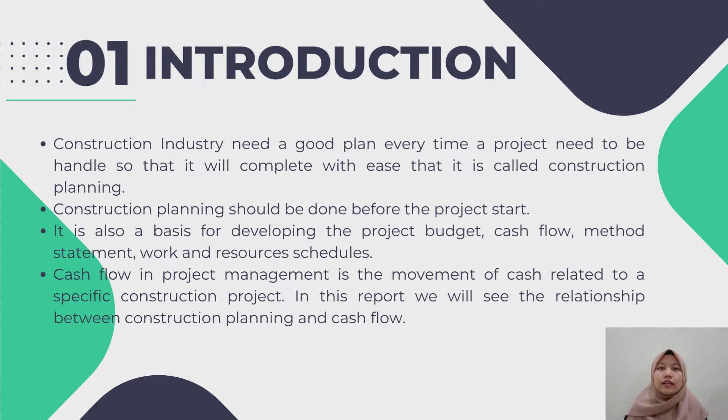Cash flow in project management is the movement of cash related to a specific construction project. In this presentation, we will see the relationship between the construction planning and cash flow.

Now, for the project background, the project title for this case study is Pembinaan Semula dan Menaik Taraf Sekolah Daif tahun 2019 di Sekolah Kebangsaan Seri Paya, Batu Pahat, Johor. The building is located at Parit Raja, Batu Pahat, Johor. This project is a new construction of a one-story school.

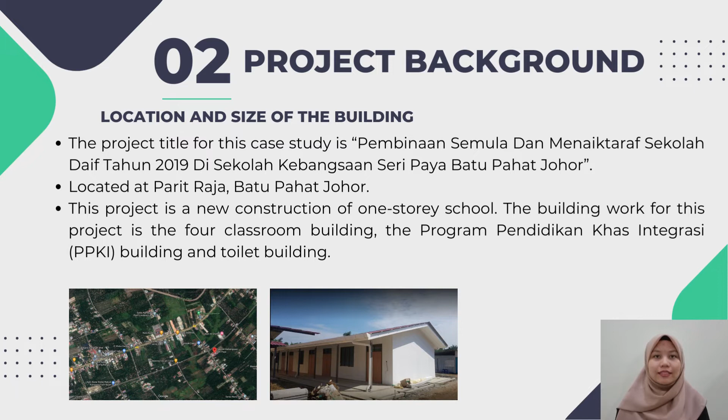The building work for this project is the 4-classroom building, the Program Pendidikan Khas Integrasi (PPKI) building, and the toilet building. The client of the project is Kementerian Pendidikan Malaysia (KPM), known as the Ministry of Education (MOE). It is a ministry of the government of Malaysia that is in charge of the education system.

The users of the building are people who go to work and study at Sekolah Kebangsaan Seri Paya, known as SK Seri Paya, which is a primary school.

The purpose of making this building is to achieve Malaysia's mission of making schools in rural areas so that every child can still go to school. This mission is called Construction of Sekolah Daif. That's all for the project background.

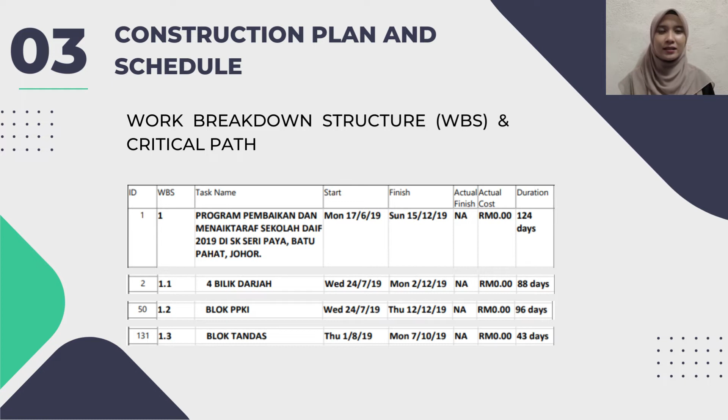The tool used for this critical path method is Microsoft Project. During the process of filling in all the work for the project, there were no errors detected. All specified job sequences and the given durations are not stacked. This may be because the project is not so big.

The element frame for the PPKI block is the longest, which is 25 days. This is because the PPKI block uses the method of in situ concrete, which takes longer than the frame for the toilet block, which takes only 6 days due to its smaller area compared to the other blocks.

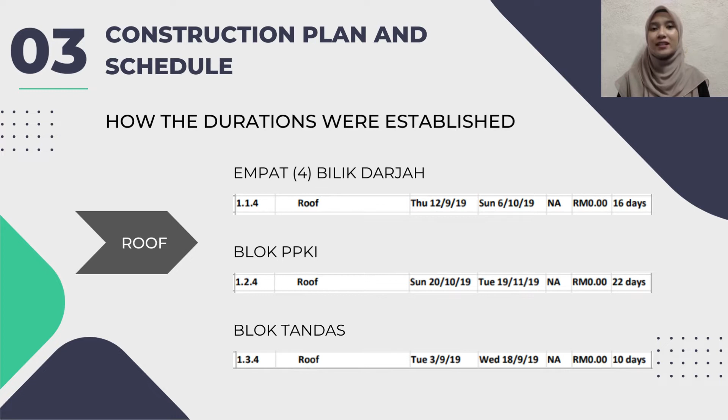The frame construction process is also complex as it is necessary to follow the desired sequence and indeed takes time to complete. Next, for the element roof, the duration was established accordingly. The roof installation work is carried out after the preparation of frame construction. Block PPKI takes 22 days for roof installation, which is longer than the other two blocks. This is because the design of the roof is slightly complex.

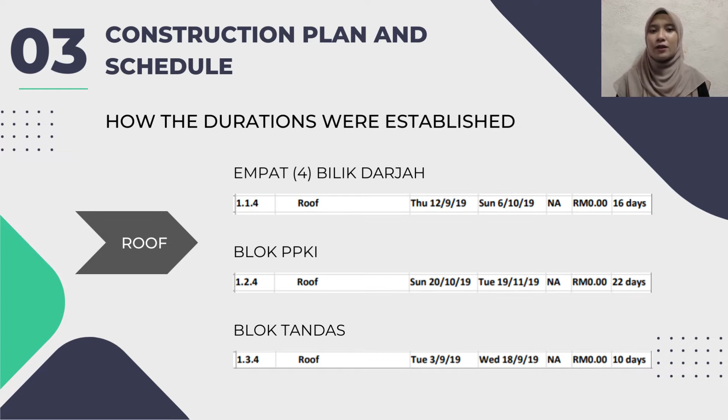The specified period is the amount of time that is acceptable. This is because the type of roof used for this school building is a kind of clapboard roof, and roofing materials are also easily available.

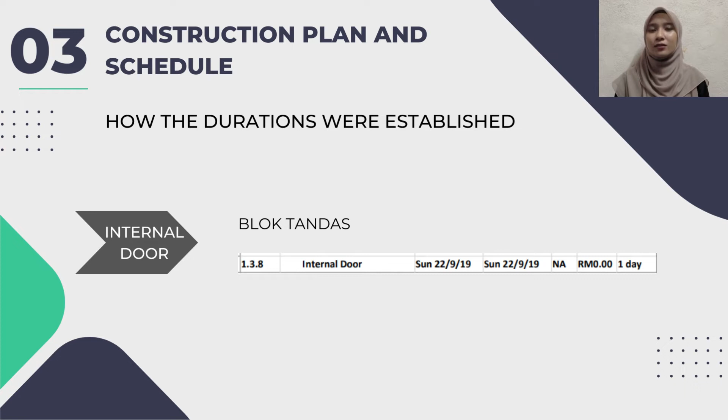Furthermore, for the internal door element, the internal door is installed after the preparation of the external door. This is because the workers who install the door are the same for all external door installation work. The duration of the installation of the internal door takes 1 day only. This is because the internal door to be installed is in the toilet area only. The type of internal door installed is PVC material, which is usually used for toilets.

In this project, critical tasks are work below lowest floor finishes and frame construction. Other construction work needs to wait for the preparation of the work below first. After completion, it can be continued with frame construction.

The frame is the second most important phase in this project. Other elements should not be installed if the frame is still not formed, while non-critical tasks are tasks that do not depend on the completion of any other task. As an example, plumbing work can be done before or after the particular stage is completed.

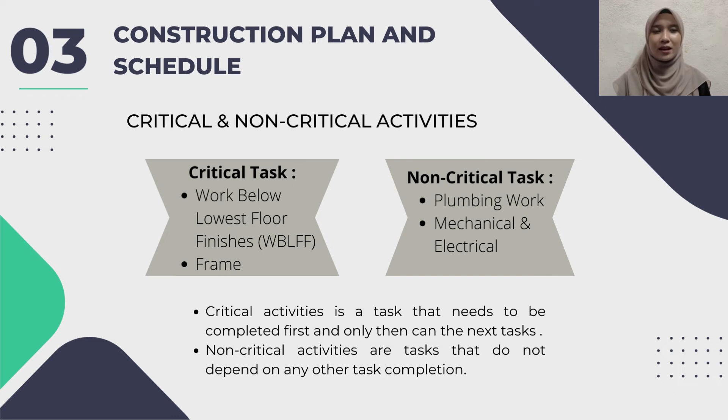For the planning tools, we chose Microsoft Project. It provides integrated Gantt chart scheduling, cost tracking, and resource management. Project is the go-to solution for most construction companies and has become tightly integrated with SharePoint over the years. Gantt chart scheduling in Project employs critical path analysis that can be manually or auto-updated depending on your need to analyze network logic.

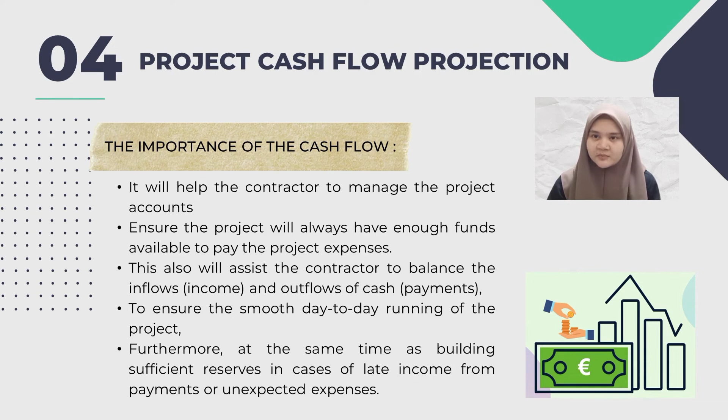Next, we will look at the importance of cash flow. Firstly, it helps the contractor manage the project accounts. Second, it ensures the project will always have enough funds available to pay project expenses. This also assists the contractor to balance the inflow and outflow of cash. Next, it ensures the smooth day-to-day running of the project. Furthermore, sufficiencies are built in case of late income from payment or unexpected expenses.

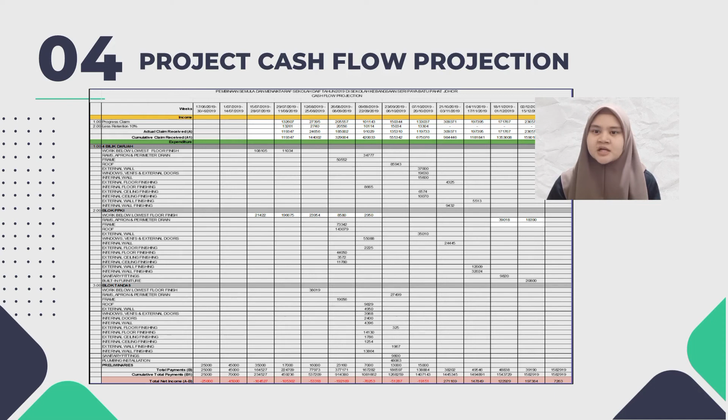In addition, here's our table for the cash flow projection that we use to create our S-curve and sawtooth diagram. That's all from me. Alif will continue with the explanation of S-curve. Thank you, Shafika. Hi, Assalamualaikum.

We're back again with me, Alif, on another part, the S-curve explanation. The display of anticipated financial flows on the timeline using a cumulative cost chart, whose representation is the S-curve, is a useful method for assessing how well a building project's financial investments were used. From the start of building until finish, the S-curve depicts the cost of the investment project.

The cumulative cost chart for building projects has an S shape, therefore the curve's name. The cost curve's fluctuating slope reflects how quickly work is progressing overall. In projects, it is presumable that the profile of total cost versus time elapsed will resemble an S-curve. The Guide to Project Management Body of Knowledge, the PMBOK, describes the S-curve as a visual representation of cumulative cost, labor hours, percentage of work, or other factors plotted against time.

Moving on to the construction of the S-curve: S-curve analysis in construction is interpreted as managing a project with knowledge and traceability in the context of sustainable construction, while displaying the cumulative cost, labor hours, or other quantities plotted against time. To construct them, we must have a progress claim for work done, project cash flow schedule, the claim which includes prelims, work done, or materials, and allows a 5 to 10% retention sum.

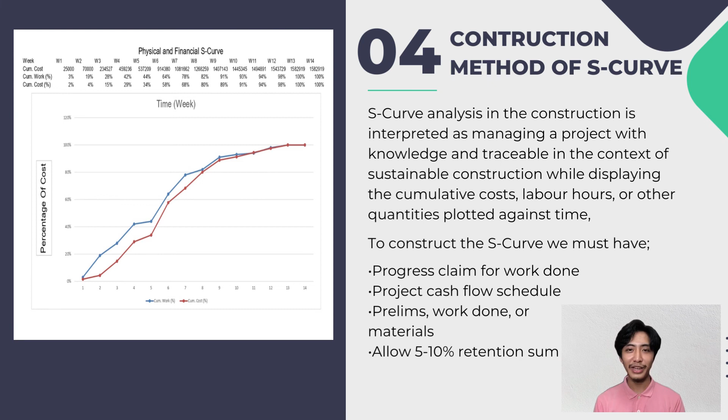And then the highest capital for the contractor, last but not least, is the profit in week 14. As we can see in the table, it is 7,263 ringgit. That's all from me. Now I will invite Nora Amir Afika to continue our presentation.

In conclusion, construction planning plays a big part in starting a construction project. For the project of reconstruction and upgrading of Sekolah Daif 2019 at Sekolah Kebangsaan Seri Paya, Batu Pahat, Johor, it took about 6 months for all the building to be completed. The project's S-curve and sawtooth diagram, along with the project work breakdown structure, show a better understanding of the movement of money and the construction planning for this project. That's all from our group. Thank you.